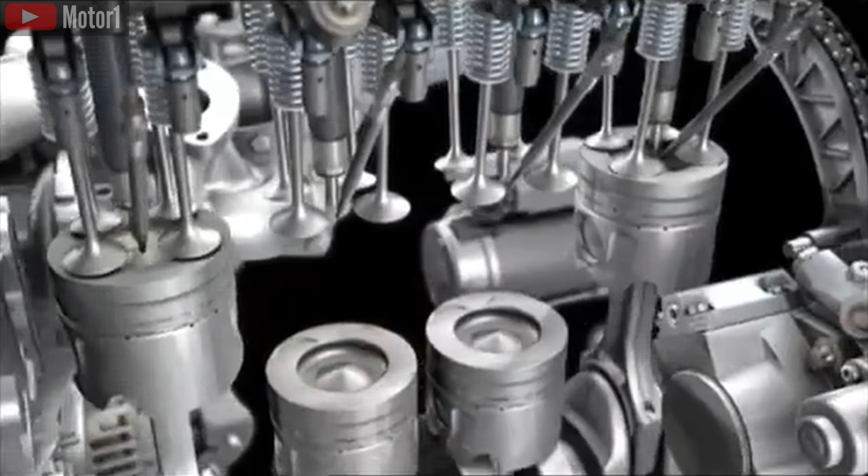Diesel piston engines might just be the future of general aviation, at least in the short to medium term. It's a bold claim, so stick around and I'll provide some objective arguments as to why the removal of lead from Avgas effectively sealed the fate of Avgas-powered aviation engines, and why diesel aero engines could dominate the skies in the years to come.

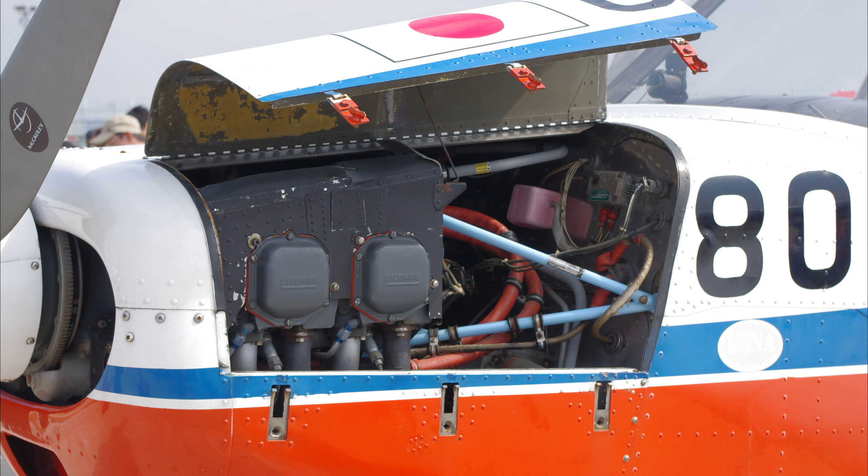Leaded fuel started being phased out for automotive use during the 1970s, with a complete ban in place by 1996 in the US and 2000 in Europe. Yet, a quarter of a century later, it remains widely used in general aviation. It makes sense when you consider that most light aircraft engine designs trace back to the 1940s and 50s, when engines were designed specifically for leaded fuel.

That said, the development of unleaded aviation fuel has been underway for over a decade. Notable examples are Swift 94UL and GAMI's G100UL, the latter of which has been in development since 2010 and achieved a major breakthrough in 2022 when the FAA granted an STC for its use across the entire general aviation spark ignition engine fleet. That's despite some aircraft and engine manufacturers not explicitly approving its use, a situation that's opened up a big can of worms, which I'll get to shortly.

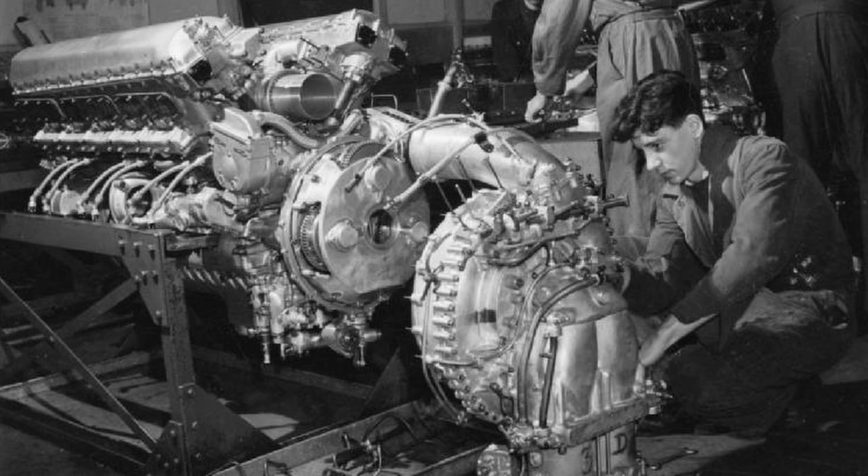Lead, or TEL, short for tetraethyl lead, was first added to aviation fuels in the 1920s to boost its octane rating, improving its resistance to detonation. By the late 1930s, the value of TEL was fully realized in the race to develop high-performance aero engines leading up to World War II. After the war, leaded Avgas became the standard fuel for general aviation, and still is today.

We know lead is a dangerous neurotoxin, so its removal from aviation fuels is absolutely necessary. There is no debate about that. What the debate is about is just how significant a challenge this poses for general aviation.

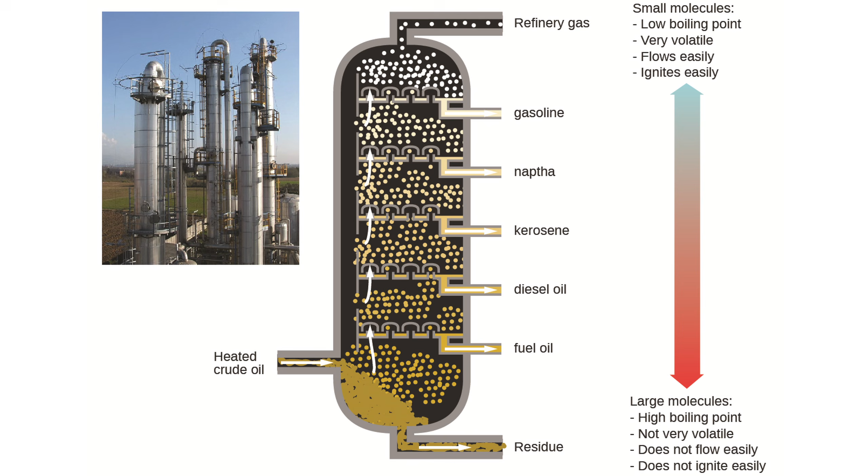Without lead, the octane rating of Avgas needs to be maintained through other means, usually by using aromatic hydrocarbons with naturally high detonation resistance, advanced refining techniques, stricter quality control, and in some cases additional octane boosting additives. This is followed by thousands of hours of testing to ensure the new fuel doesn't damage the engines, fuel tanks, fuel system components, sealants or rubbers used in the few 100,000 Avgas-powered general aviation aircraft around the world.

In October 2023, the University of North Dakota's flight school started long-term testing of Swift 94UL. With nearly 100 aircraft in their fleet, this was a significant commitment toward large-scale public testing of unleaded Avgas. However, less than 6 months into the trial, testing was abruptly halted, with UND citing evidence of significant valve seat recession in their Lycoming engines as the reason.

This came as a shock to many, especially considering that low-compression piston aero engines have run on high-octane, unleaded automotive gasoline for decades without problems. Nonetheless, this came as a stark reminder of reality, and that despite all the testing, some uncertainties were still very much in play.

In another blow to unleaded Avgas, in mid-2024, Cirrus issued a service advisory stating that G100UL is not approved for use in their aircraft, and doing so could void engine warranties. That raised a serious legal question. Can manufacturers really void warranties for using unleaded Avgas when the FAA has already approved its use?

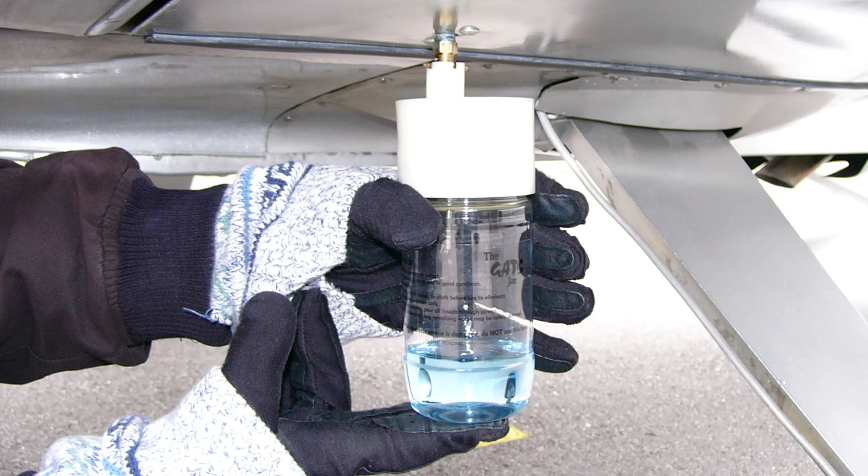All this consumer doubt is created around a product that, other than removing lead, does nothing to reduce overall CO2 emissions, while the general aviation sector remains a potential target for drastic emissions regulations. At the same time, 100LL is becoming scarcer and more expensive, a trend that will continue until it's no longer feasible to produce.

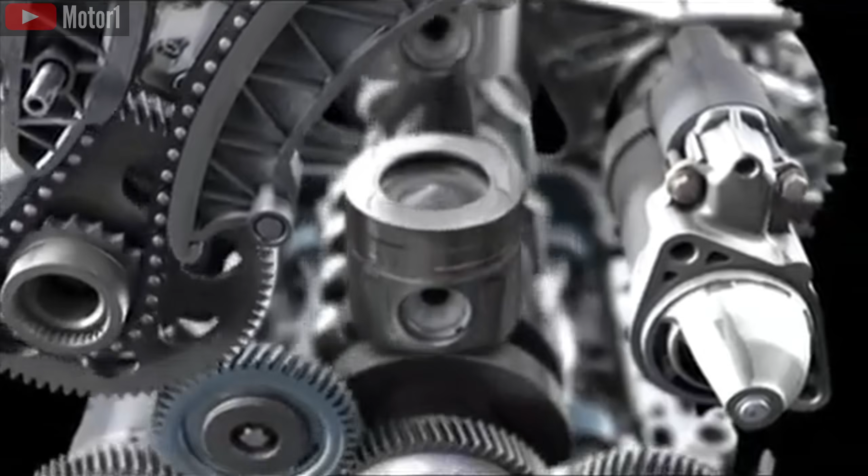So, the combination of 100 low lead availability, inevitable emissions regulations coming for general aviation, and the uncertainty surrounding unleaded Avgas is having the unintended side effect of effectively opening the door for diesel aero engines to gain a larger foothold in the general aviation market. And this isn't just my opinion. Aero engine manufacturers like Continental, DeltaHawk and a handful of others must have also thought along those lines more than a decade ago already when they heavily invested in diesel engines.

Some will of course argue that electric or hydrogen power is the future of general aviation and is just around the corner. That might be the case 30 years from now, but I seriously doubt either will be feasible for general aviation in the next 10, probably 20 years. But do you know what is available right now? Is technologically feasible today? Solves the lead problem, solves the fuel availability problem, solves the fuel price problem, and even reduces emissions? If you're watching this, then you already know from the video title. It's diesel engines.

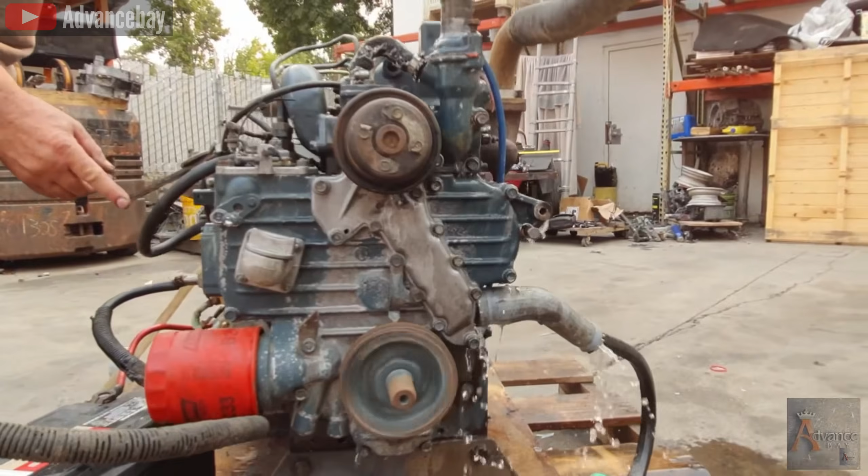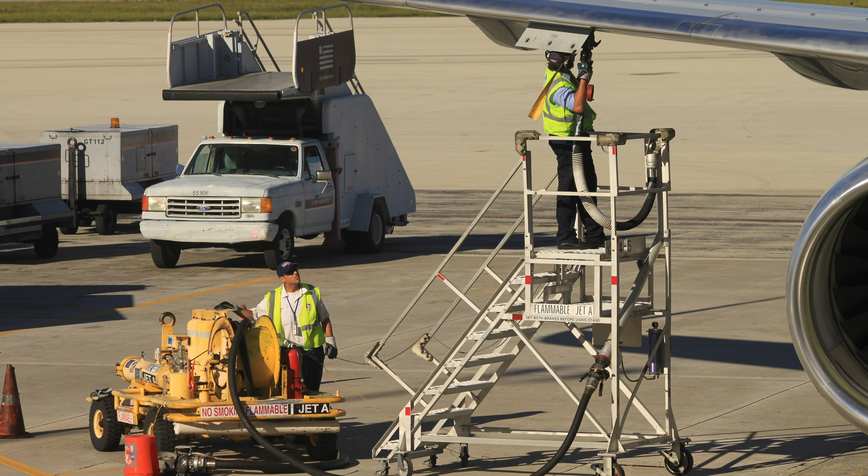When I mention diesel engines in this video, I'm referring to compression ignition piston engines that can run on either diesel fuel, like what you'd find at an automotive filling station, or jet fuel, a term that collectively refers to Jet A and Jet A1, the fuels used by airliners which is widely available at airports.

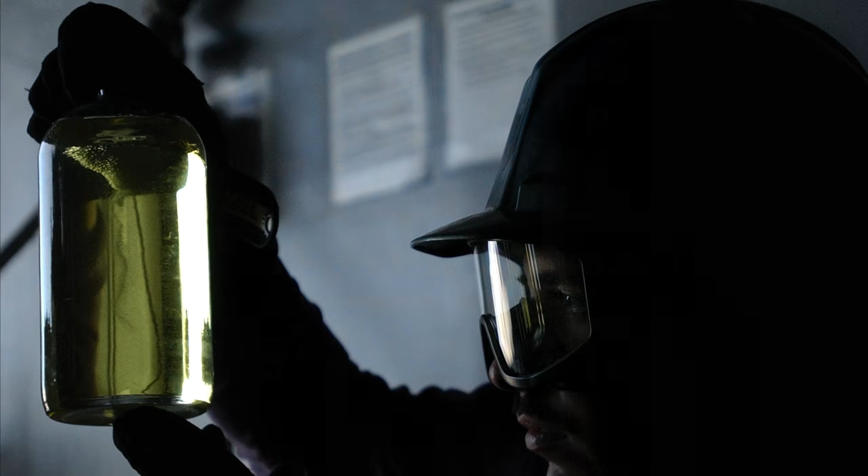One advantage of jet fuel over automotive diesel is its lower gelling point. Diesel fuel starts to gel at temperatures as high as minus 15 degrees Celsius, while, for example, Jet A1 doesn't gel until about minus 47 degrees Celsius, making it more suitable for high altitude operations.

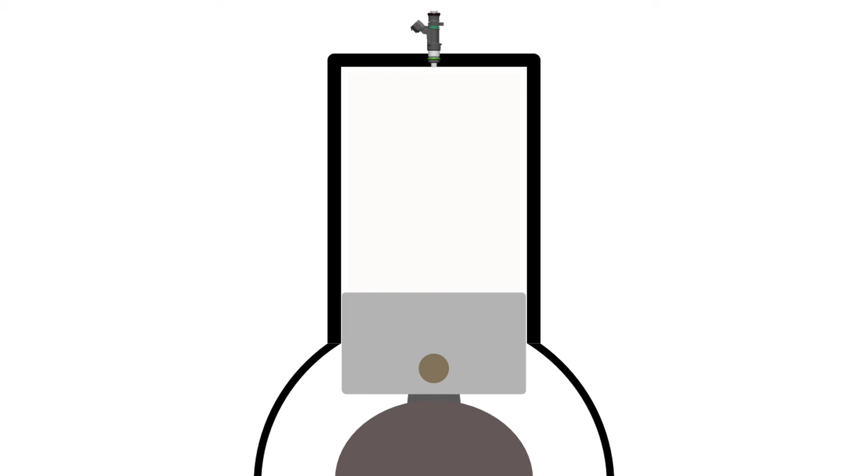Both diesel and jet fuel are kerosene based and are safer to handle since they're less volatile than petrol. This property does dictate the design of diesel engines, which I'll dive into later in the video. Another key advantage of diesel engines is their wide compatibility with sustainable aviation fuels, which largely future-proofs them.

Let's address a key question. Why would diesel be the answer to general aviation when it's problematic in the automotive sector? While diesel engines produce less CO2 emissions than petrol engines, they do emit nitrogen oxides, or NOx, which are harmful to humans. This is a major concern in the automotive world, but it's much less of an issue in aviation.

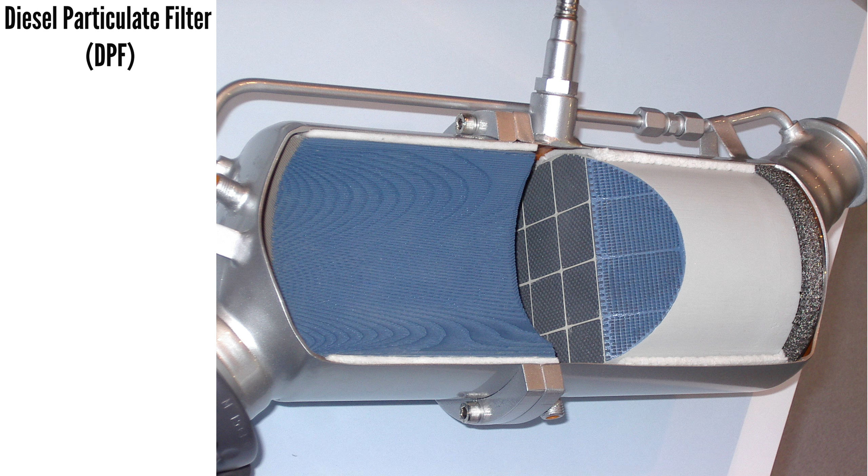Airplanes fly high in the sky, far above where people are walking around and breathing in pollutants. Even at airports where planes take off and land, the localized impact is much smaller compared to the widespread NOx pollution caused by road traffic. Furthermore, NOx emissions can be further reduced with advanced particulate filter technology.

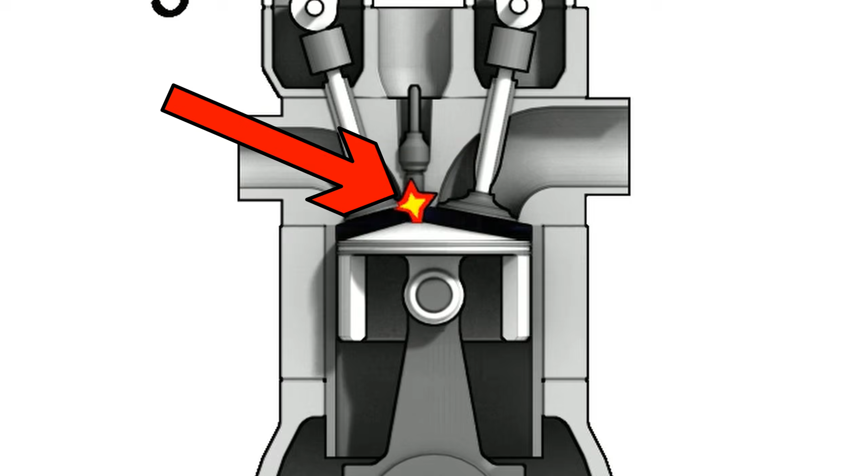To fully understand the real-life impact of the advantages and disadvantages of diesel engines, it may be helpful to briefly cover the design of diesel engines and how they operate. The main difference between petrol and diesel engines is how the fuel is ignited. Petrol engines are spark ignition engines, meaning they rely on a spark to ignite the air-fuel mixture. In contrast, diesel engines are compression ignition engines. They don't require a spark, and instead fuel is injected directly into highly compressed and heated air, which then ignites.

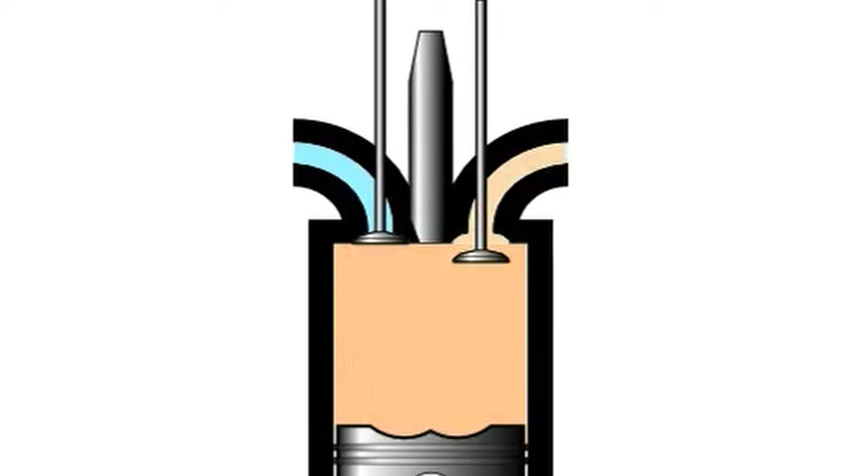This offers several advantages. Since diesel engines pull only air into the combustion chamber, combustion can only start once fuel is injected. This means diesel engines don't have detonation issues and can achieve much higher compression ratios.

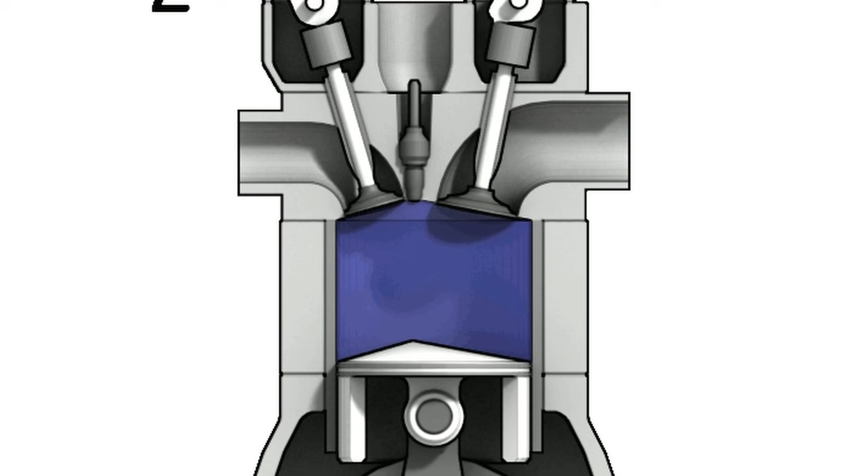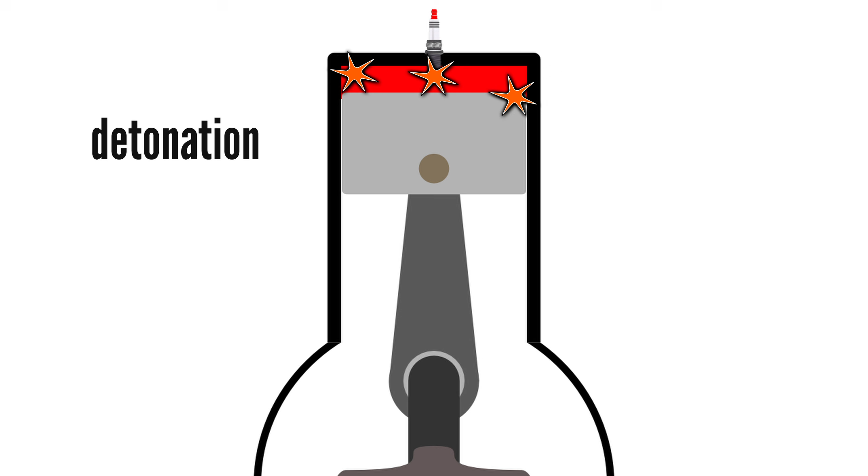In petrol engines, an air-fuel mixture is drawn into the combustion chamber, where it's compressed and heated. Ideally, combustion starts when the spark ignites the mixture. However, because compression heats the air-fuel mixture, with petrol being more volatile than diesel, the mixture can ignite before the spark if it's compressed and heated too much. This results in detonation that can damage the internal components.

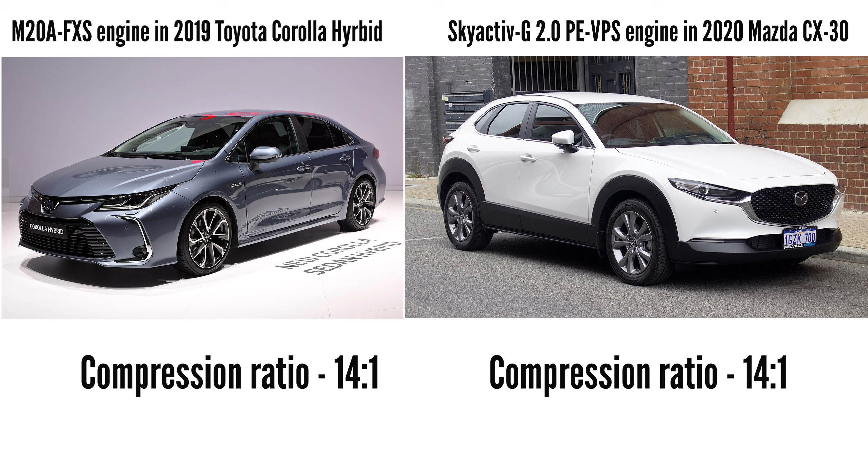To prevent detonation, petrol engines have relatively low compression ratios, typically maxing out around 12:1, potentially up to 14:1 in ultra-modern direct injection automotive engines. Diesel engines, on the other hand, can have a compression ratio of up to 22:1.

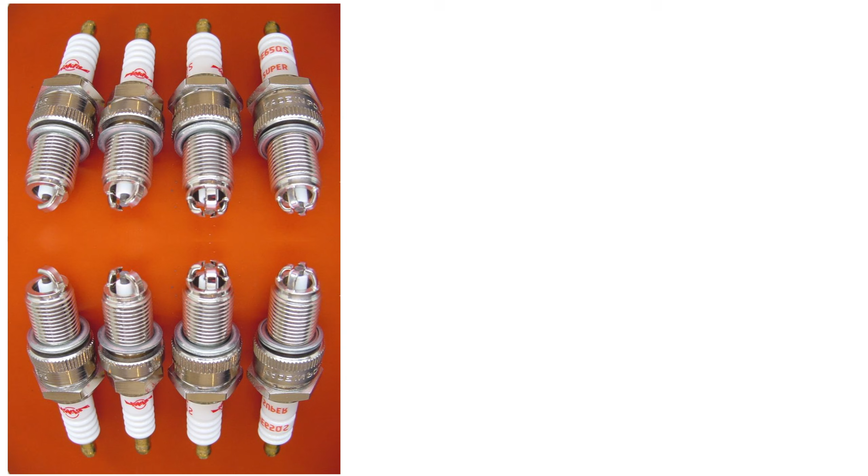Another advantage of diesel engines is that, since they're compression ignition engines, they don't need spark plugs, magnetos, or electronic ignition systems. With fewer moving parts, diesel engines have fewer components that can fail, which enhances their overall reliability.

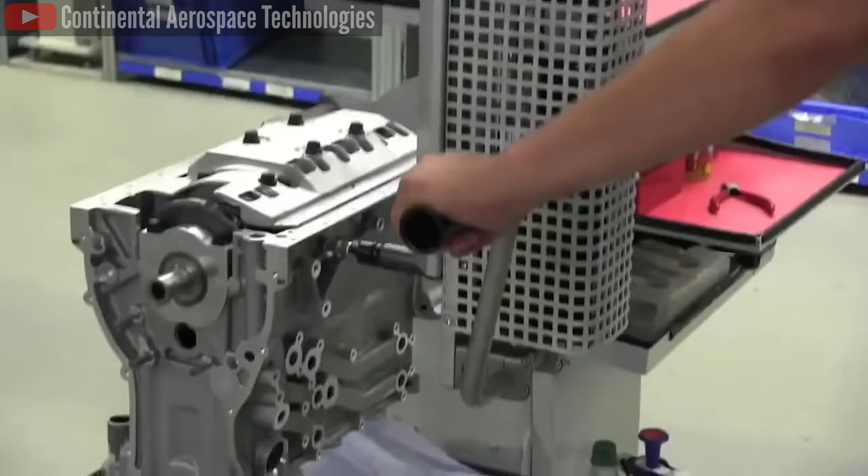The obvious advantage of diesel engines is its greater efficiency, thanks mostly to higher compression ratios. Additionally, diesel engines produce fewer carbon emissions. But it has its downsides too. Because diesel fuel can handle much higher compression ratios, they must be built more robustly to withstand the extreme pressures in the combustion chamber. This not only increases the engine's purchase cost, but also adds weight.

Weight is the enemy of airplanes. In the automotive world, an additional 20 kilograms in the engine bay doesn't make much of a difference. But in the nose of a light aircraft, an additional 20 kilograms can be a deal breaker.

However, there's another point that's rarely brought up in these discussions. Yes, diesel engines are heavier, but they're also more fuel efficient, meaning they burn less fuel. And since fuel has mass, using less of it means the aircraft needs to carry less weight in fuel.

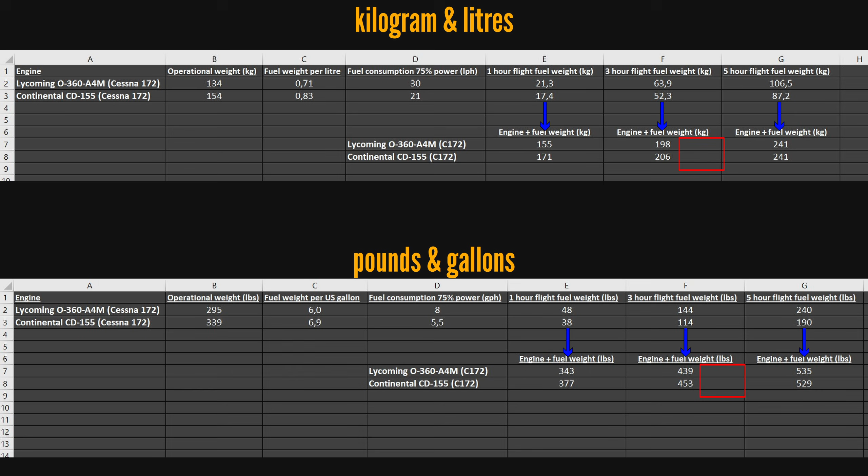You can see in the calculations on screen that the longer the flight, the more the diesel engine's extra weight is offset. Of course, for short flights with just an hour of fuel as an example, very little of the engine's added weight is offset. But if a flight is long enough, the additional weight of many diesel engines are fully offset.

Even so, it doesn't solve potential center of gravity issues, as a heavy engine can make an aircraft nose heavy with a very forward center of gravity. But this can usually be addressed fairly simply by mounting the engine further back, if possible, or adding a small amount of weight to the aircraft's tail with minimal impact to useful load.

At this point, considering only the facts specifically mentioned, I believe diesel aero engines have the edge over petrol engines. But they come with a few more disadvantages not yet covered.

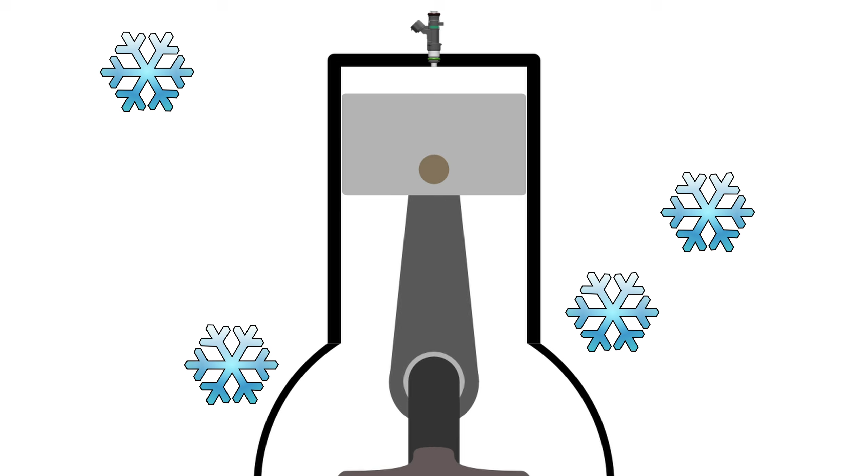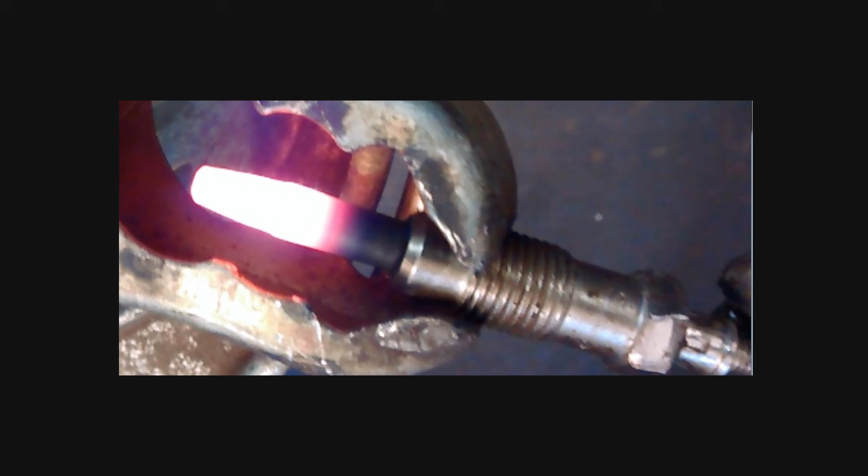One is that diesel engines are more susceptible to issues with cold starts. Since diesel ignition is temperature dependent, low ambient temperatures can make combustion more difficult to achieve at engine start. And perhaps more seriously, this also affects starting a dead engine in flight, but this is somewhat mitigated by the use of glow plugs. And of course, the limited STCs available for diesel retrofits on type certified planes doesn't help its case.

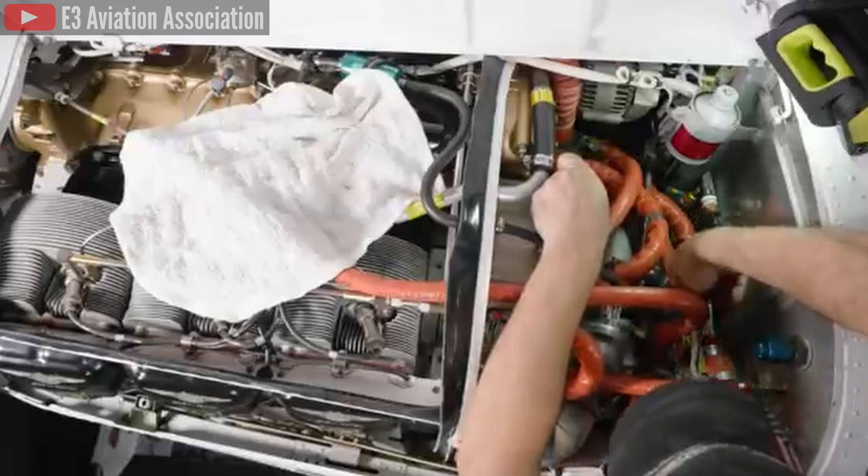Another hurdle for the growing diesel engine market is the need for mechanic and technician training. Mechanics certified to work on opposed air-cooled Avgas engines won't automatically have the know-how or be allowed to work on inline diesel engines. This means they'll need additional training, which could lead to a shortage of qualified mechanics in the short term.

One somewhat common question that comes up is how these aero engines prevent or control diesel runaway.

Diesel runaway occurs when an engine begins drawing fuel from an unintended source, usually causing it to overspeed, often even after shutting down the engine.

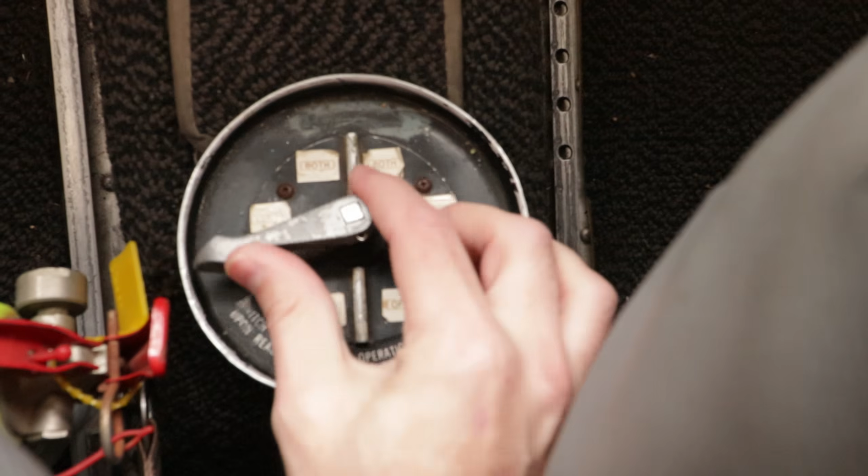While certainly not impossible, the risk of diesel runaway is much lower in aircraft than in cars. This is due to several factors like fuel shut-off valves in the cockpit, advanced fuel control systems, electronic overspeed protection, and early warning through sophisticated engine monitoring systems—systems more advanced than what you typically find in a car.

Additionally, aircraft engines are subject to much stricter maintenance protocols than car engines, further reducing the likelihood of diesel runaway.

One final point against diesel engines is the perception that they're in direct competition with electric and hydrogen power for the future of general aviation. This doesn't make much sense though.

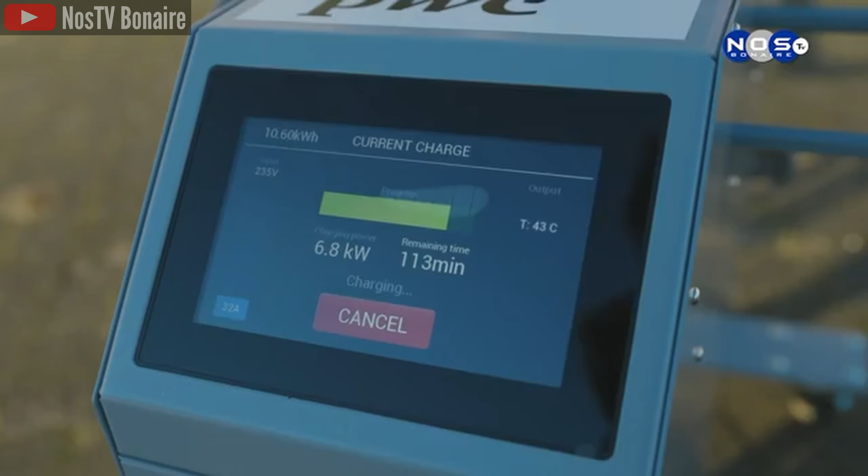Diesel engines are a mature technology with a proven track record and is available right now. On the other hand, electric and hydrogen technologies are still in their infancy with many major challenges yet to be solved. Yes, electric airplanes seem to be everywhere lately, and some like the Velis Electro are even EASA and FAA approved for training. Electric power just isn't a realistic replacement for Avgas engines at the moment.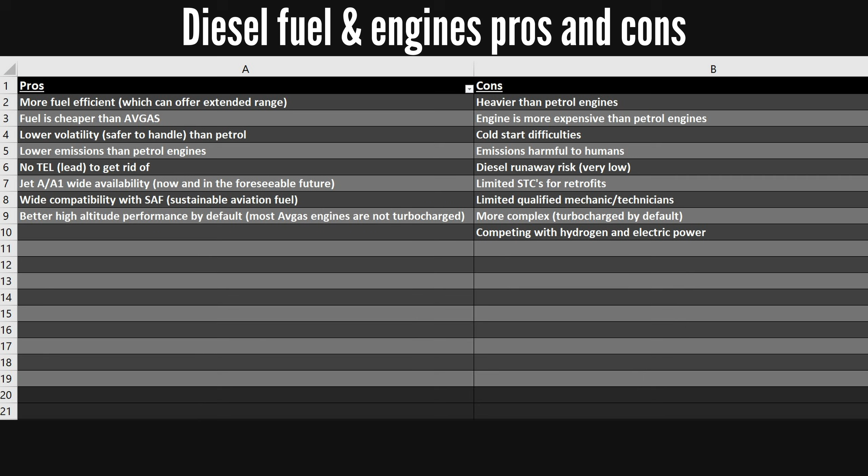Diesel engines, on the other hand, already meet the vast majority of use cases. Before diving into some of the available diesel aero engines on the market, here is a summarized list of the mentioned advantages and disadvantages of diesel engines compared to petrol engines in the context of aviation. Pause here if you'd like to go through it in detail.

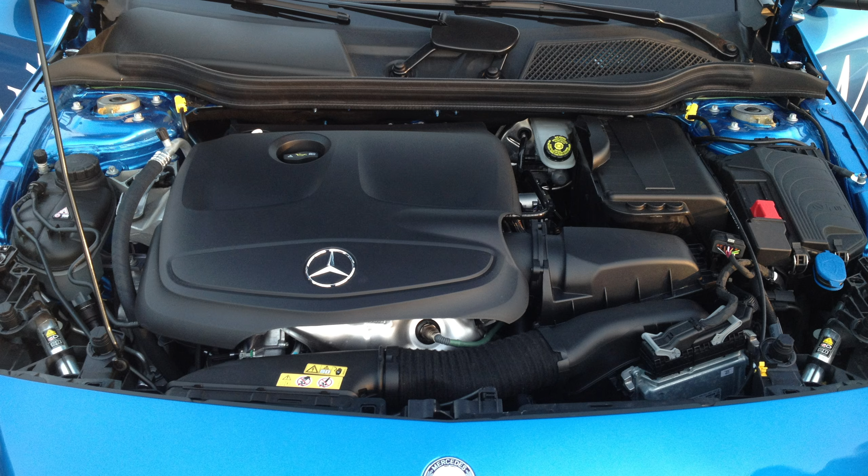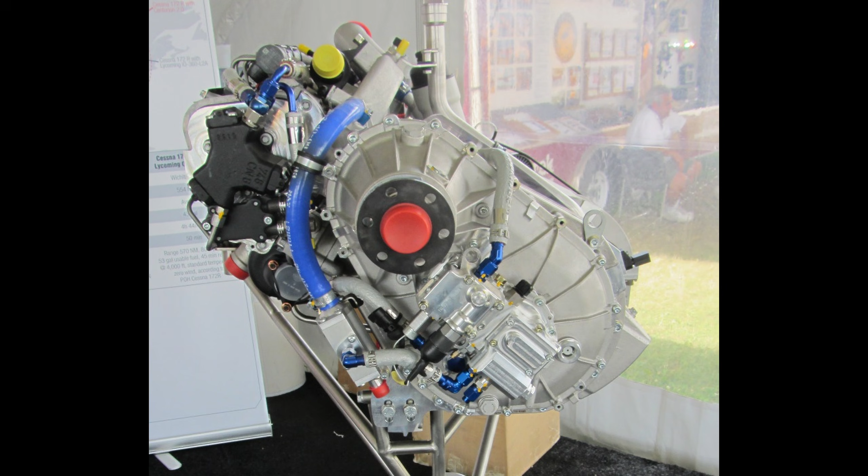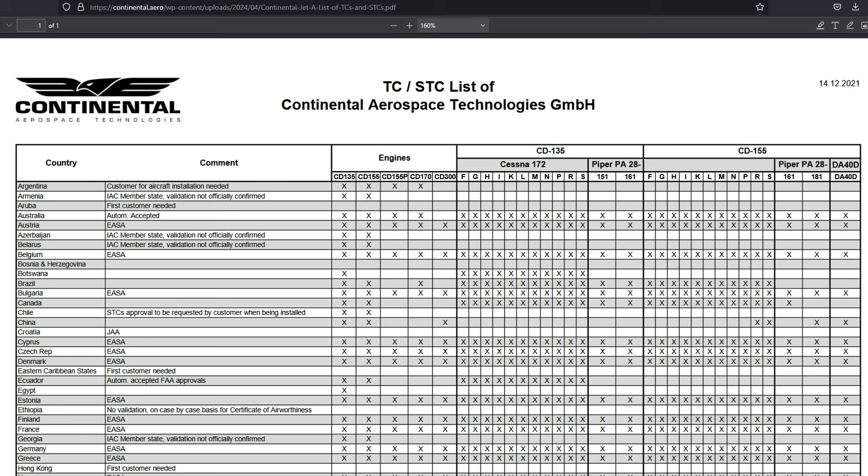I won't cover every single one, but here are some notable diesel aero engines available. Perhaps the most well-known are the Mercedes automobile-based engines like the Continental CD135 and 155, which originated as the Thielert Centurion engines before Continental's parent company, Avic International, acquired Thielert. The 135 horsepower CD135 and 155 horsepower CD155 have STCs for popular airframes like the Cessna 172 and Piper PA-28, and they also power various Diamond aircraft models.

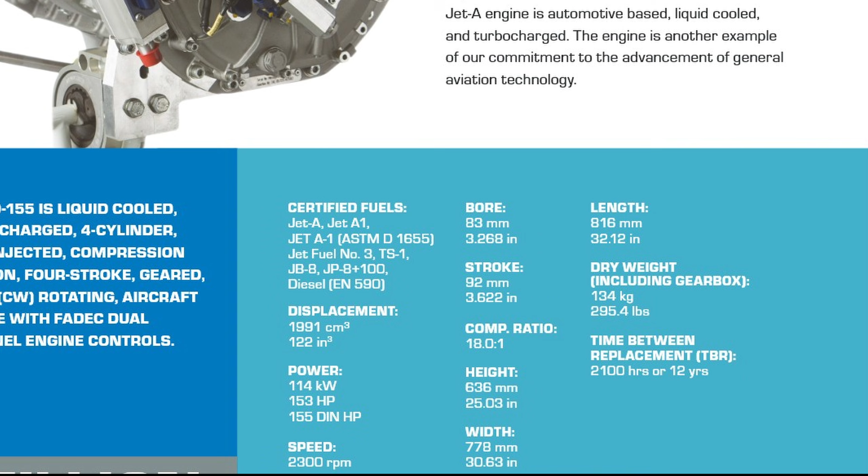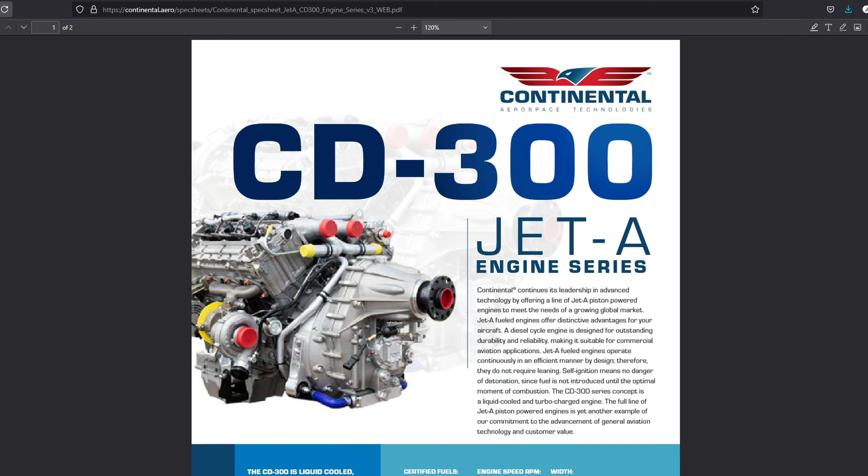Both engines are 2-liter, inline 4-cylinder, liquid-cooled, dual overhead cam, turbo diesel, gear-reduced engines. While not FAA certified, Thielert also built a 4-liter V8 diesel, which is not currently available from Continental as far as I know, but Continental does have a 300 horsepower 3-liter V6 option in the CD300.

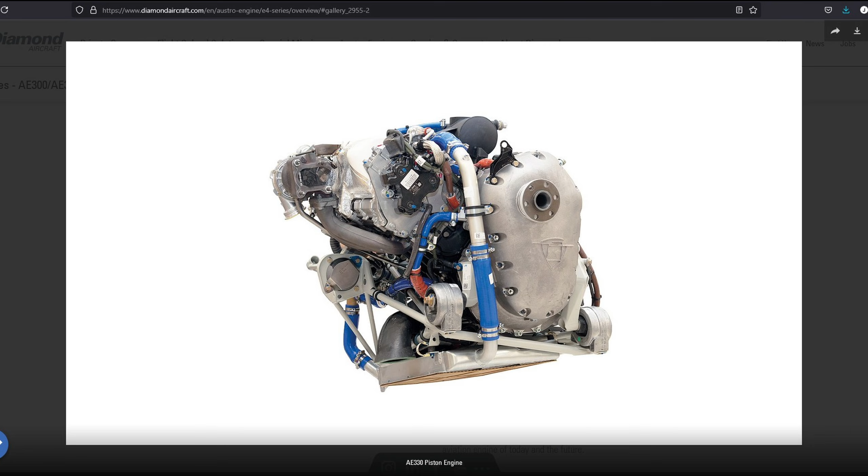Then there's the Austro AE300, which is closely related to the Continental diesels. While it's also based on the Mercedes OM640 automotive engine, Austro has taken its own development path, meaning their engine isn't identical to Continental's versions.

As an example of the different way these companies approach engine development and design philosophy, the Continental CD135 and 155 doesn't have a TBO, or time between overhaul, but has a TBR, or time between replacement, of 2,100 hours or 12 years. The Austro AE300 on the other hand does have a TBO, which is 1,800 hours. So one can be overhauled and the other can't and needs to be replaced.

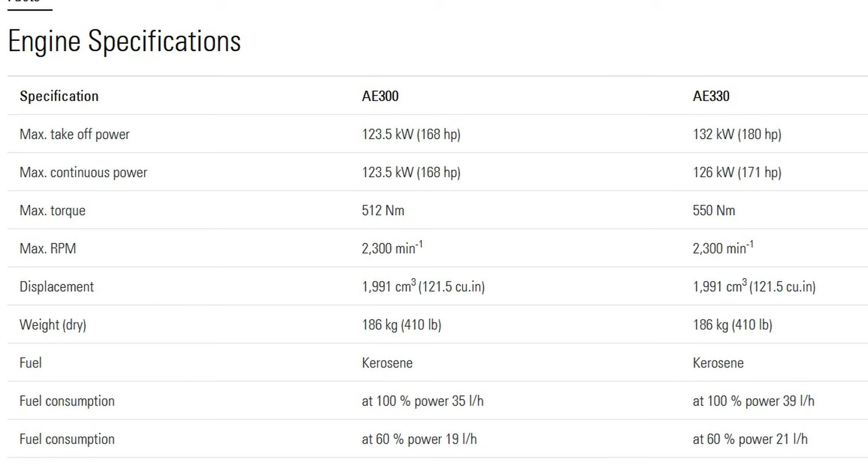The AE300, also a 2-liter inline 4, as expected, has a dry weight of 186 kilograms and makes 168 horsepower, which is quite different from Continental's version.

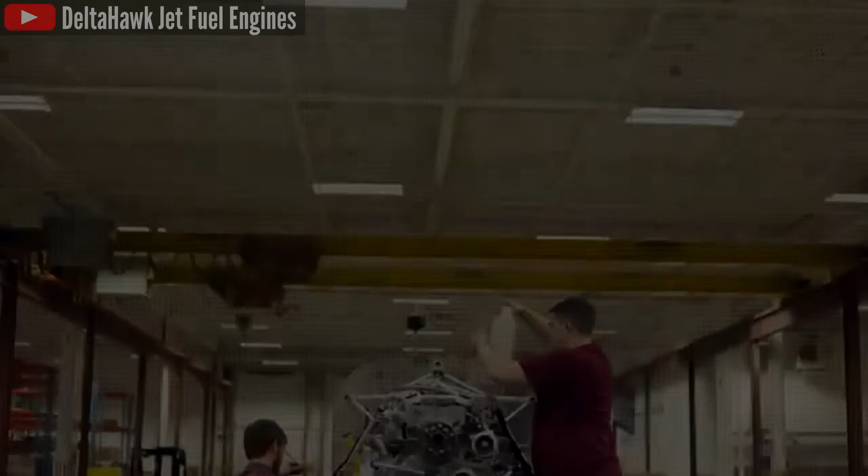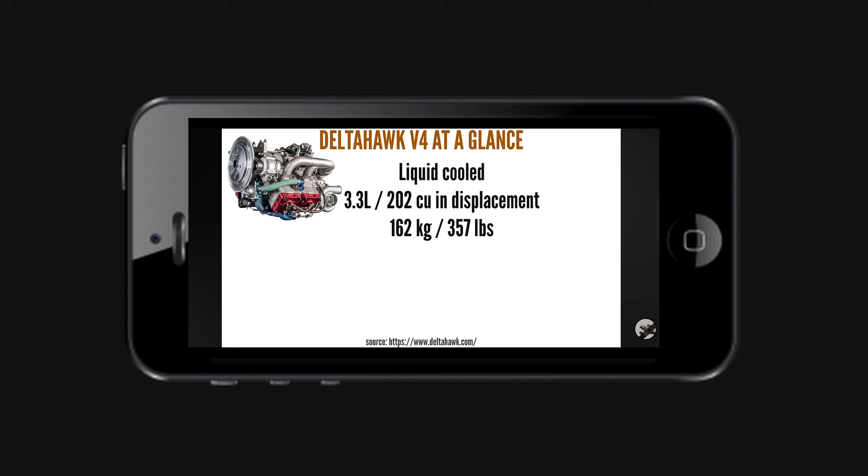As mentioned earlier, many companies have invested in diesel aero engines, and a company that thought about 25 years ago already that diesel is the future of general aviation is DeltaHawk. I've already made a dedicated video about this 2-stroke inverted V4 turbo and supercharged direct drive diesel engine.

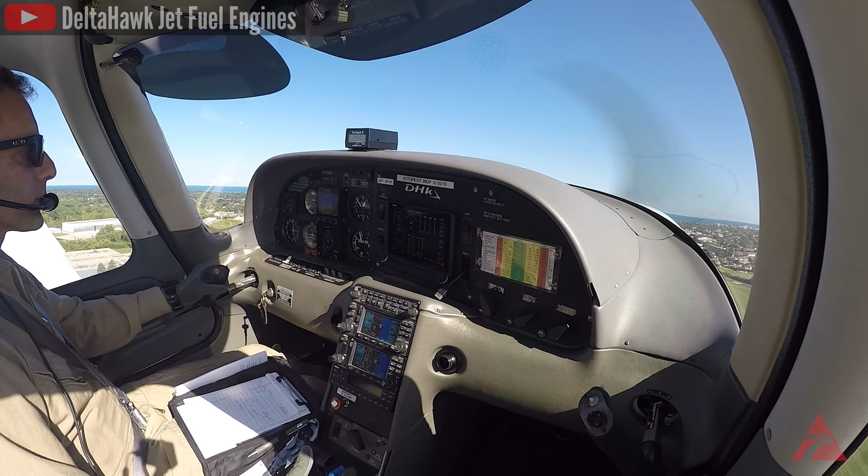The engine keeps being critically received, with many being skeptic after a lengthy 25-year development period. However, by all accounts, it seems to be a success, with the engine having been test flown on several aircraft by now, and currently a firewall forward package for the RV-14 started being developed in 2024, and its first flight was supposed to happen sometime around this video release, if it hasn't happened already.

Their engine lineup has also expanded in the last year or two. Diesel power has also revived one of the best high-power aero engine layouts, which largely disappeared from aviation since World War II, which is the V12.

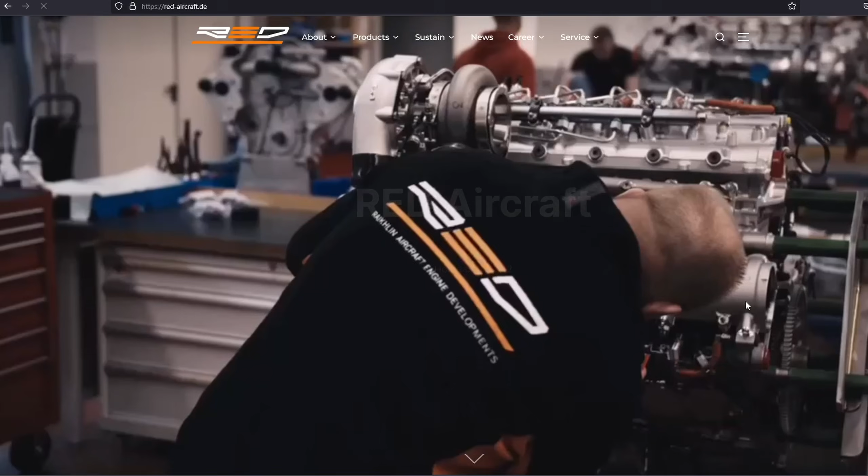And this is thanks to a new design from German company Red, called the A03. These V12s arguably make the older radials obsolete, if they weren't already, and especially for applications like crop spraying, where turboprops are often too costly to operate.

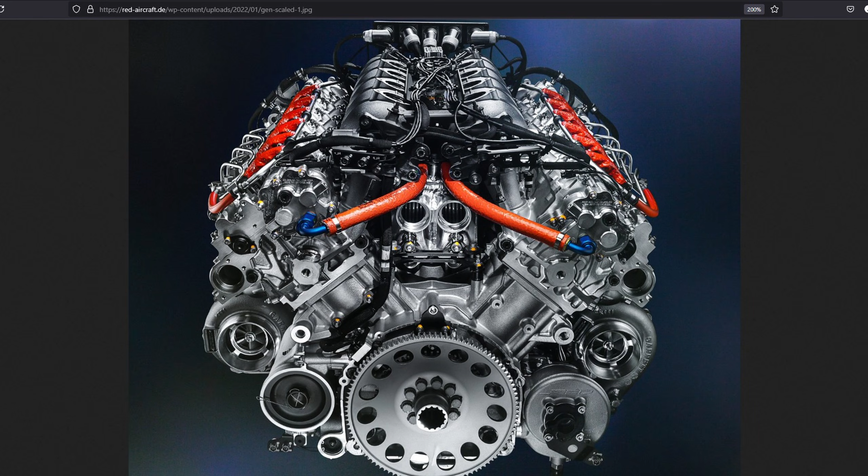With their diesel V12, Red is directly competing with turboprops in these markets, offering a much more fuel-efficient alternative. And with over 500 horsepower on tap, it's certainly no slouch. Their 6.1-liter V12 has a bank angle of 80 degrees with gear-driven dual overhead cams. It's a gear-reduced FADEC engine that can run on a variety of kerosene-based fuels.

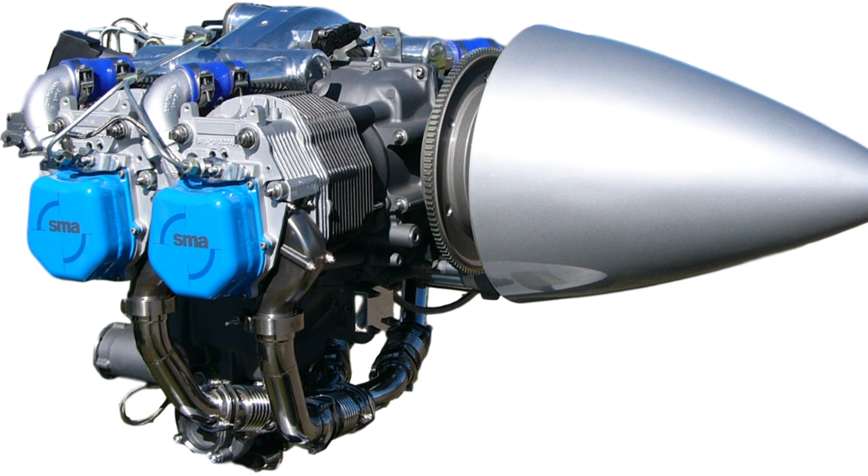Next, there's the intriguing SR305-230E from French company SMA. While the name doesn't exactly roll off the tongue, this horizontally opposed direct drive engine stands out from the diesel engines we've discussed so far. It has individual air-cooled cylinders like the Lycoming and Continental Avgas engines.

Of course, this means cylinders can be replaced without doing a full top overhaul, and on that subject, TBO is a quite high 2,400 hours.

The SMA engine powered the Cessna 182 Skylane JT-A, but it was eventually discontinued. STC development for the 182 as well as the Diamond DA50, which is still in development, seems to have stalled, leaving the future of the French company uncertain.

There are several other diesel aero engines on the market, and I plan to cover some of them in dedicated videos. But it's clear the diesel aero engine market is thriving, and if my suspicions are correct, will continue to grow. What do you think about the rise of diesel aero engines?